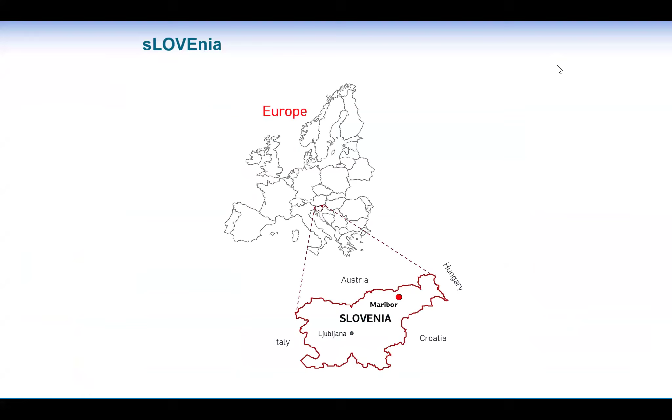So Slovenia is a very small country, as I told you. The nearby countries are Italy, Austria, Hungary, and Croatia. In between those, this small country exists.

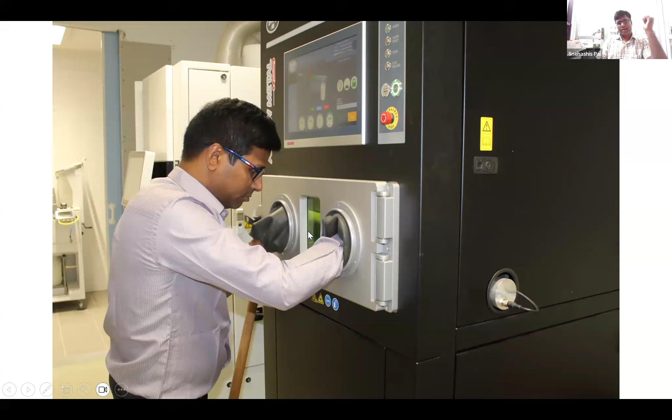This is electron beam melting. Before, it was selective laser sintering, which works using a laser, and this is electron beam melting, which works using electrons. And this is the machine for powder making, an atomizer, for the metal.

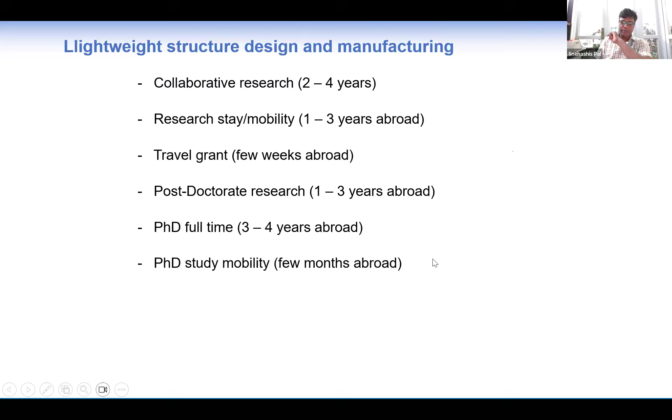There are a lot of funding opportunities. Research mobility is also possible, from a few months to a few years. For travel grants, maybe a few weeks. And postdoctorate is also an option, for 1 to 3 years, or sometimes a bit more. Also for PhD, either a full PhD or PhD mobility for a few months is possible.

Institutional funds are also possible, though sometimes quite limited. There's also DST, which sometimes gives opportunities for collaboration with Europe and other countries. So there are a lot of possibilities, and the funding may cover monthly salary, or per day for short visits, as well as travel expenses, accommodation, health insurance, visa costs, and other research costs if needed.

So it is possible. If somebody is interested, you can contact me later, or we can discuss it further.

Let's start about metal printing, how we can do the process, and what happens inside the material. So additive manufacturing, also known as 3D printing, is very well known. But technically, we can say additive manufacturing is a layer by layer process to build up a full product. Additive manufacturing is actually very good for reducing pollution.

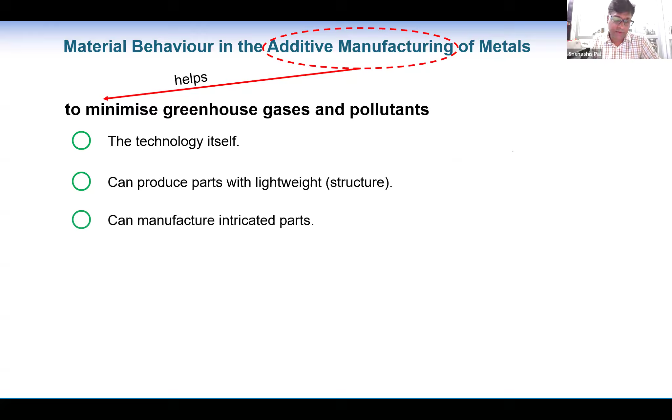It's a technology and process where less greenhouse gases or pollutants are released. It can also produce lightweight structures, structurally optimized, like topology optimized structures or cellular structures. We can design it in a CAD model and directly print it as is. In most materials, including metal, it's possible to fabricate those designs or parts.

And it can be manufactured as an intricate part, so we can use it for other purposes, like a micro reactor, for solar fuel generation, or a heat exchanger. It is possible to fabricate this easily.

Also, customized production is possible, even for bone implants, which is mostly why people use this, like skull implants, hip joints, knee joints, something like this.

On-site fabrication is also possible, as the machine is very small. We can just connect it with an inert gas and power system, then start fabrication wherever we want. So it's very easy to fabricate in most places.

And the charging capacity of batteries can be increased using some technologies, by controlling the metallurgical properties. This is possible by changing the metallurgical properties, or the porosity. We can generate, for example, a thermoelectric generator.

We can also prepare a hydrogen production system that can be increased, by breaking hydrogen and oxygen apart with the material process. As well, we can capture solar energy by using different types of control systems in the manufacturing process.

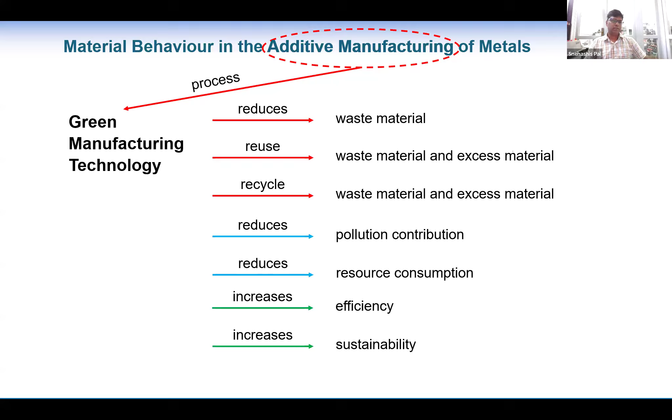And 98% of material can be reused as well, and recycling is also possible easily. So that's why it reduces pollution, reduces resource consumption, and increases efficiency and sustainability. That's why in the future it will be very much needed for manufacturing, especially for customized as well as mass production, because mass production is still costly. But if we can increase the possibilities and the technology, later on we can control the cost.

In additive manufacturing, the process is very simple compared to conventional manufacturing. In conventional manufacturing, we have to melt the material, make a casting, and then go for shaping or turning to get the product. For additive manufacturing, only one machine is enough to fabricate whatever part we need. From a CAD model, we can input it here and fabricate that part.

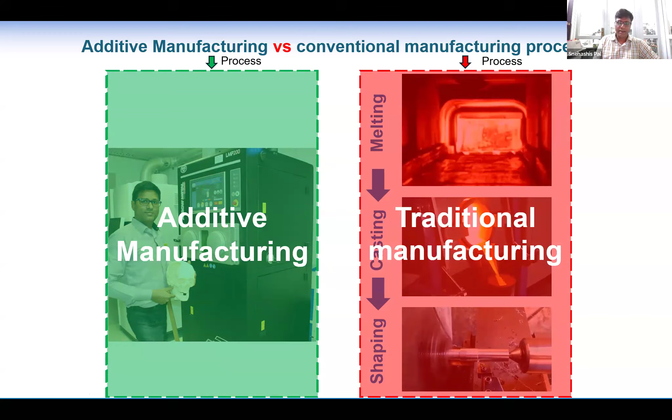So this is all the conventional manufacturing process we have to go through, while additive manufacturing is very simple. That's why it can be an easier manufacturing process, where machine learning is possible, and AI technology can easily be input there for fabrication. It's actually in the research process now.

In additive manufacturing, there are several types, depending on the technology and material used. There's selective laser melting, where laser power is used to melt the material, ranging from 10 watts to about 300 watts. It can be a little less or more, but 100 to 200 watts is usually enough for melting the material.

For electron beam melting, electrons are used to melt the powder, using a few kilowatts of power. For selective laser sintering, used for polymers, low laser power is required to melt or sinter the powder particles—it can be tens of watts, or sometimes just a few watts, though sometimes more is required.

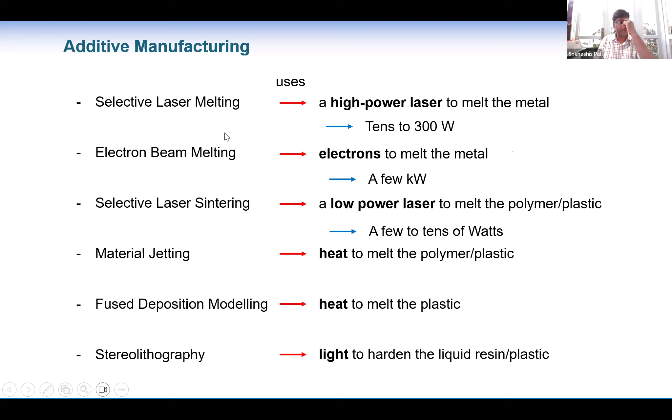There are other additive manufacturing methods too, such as material jetting, fused deposition modeling, and stereolithography, where light is used to harden resin or liquid plastic material. Today I'll mostly go through additive manufacturing for metal, since selective laser melting is the most popular among metal 3D printing processes. We'll go through it slowly.

In normal manufacturing, whatever knowledge we have can be applied directly in additive manufacturing, where chemical affinity can occur, along with thermal gradient, residual stress and shrinkage, crystallization with temperature, cooling rate, and everything else involved.

Micro cracks can occur, melt flow and Marangoni flow knowledge is required, along with pore formation—though pore formation is a bit different here. There's also high melting temperature for some metals, which can cause some problems, but it's possible in an easier way in additive manufacturing. So we have to know all this technology to control the metallurgical properties and fabricate to meet the desired properties.

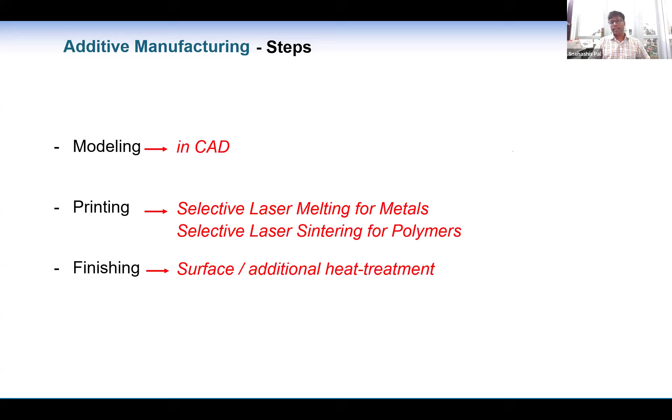In the additive manufacturing process, very simple steps are required: modeling by CAD and printing by 3D printing—that's enough, more or less, though finishing may be required. So modeling by CAD, printing—selective laser melting for metal, selective laser sintering for polymer, for example—and finishing may be required, like surface finishing or additional heat treatment.

Sometimes finishing may not be required, or it may be possible directly through the 3D printing process—there needs to be some research on that as well. It's also possible to make a 3D scan of a model, so we can replicate it in the original product system, allowing us to fabricate a similar shape accordingly.

So how do we do that? Whatever we need, we can fabricate this way: we can 3D scan a model, and by using a 3D scanning system, we can make a CAD model and then produce the part—it can be polymer or metal.

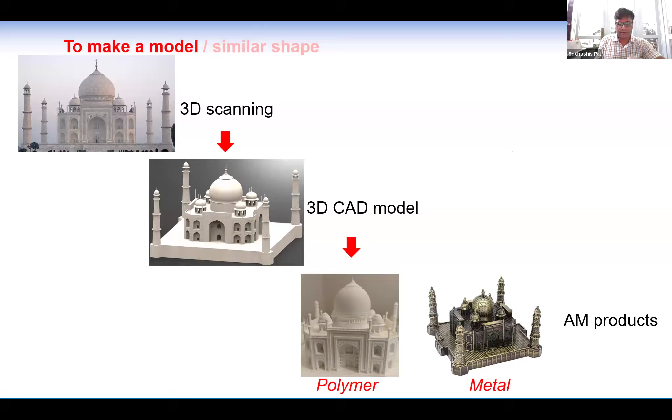A similar shape can be done whenever we need it for some specific purpose, like a bone implant or a skull—we scan it to get the accurate actual shape, and accordingly we can print it and get the part. It looks easy, but there's a lot of insight needed in the material process. Even so, we can get some intricate parts as needed.

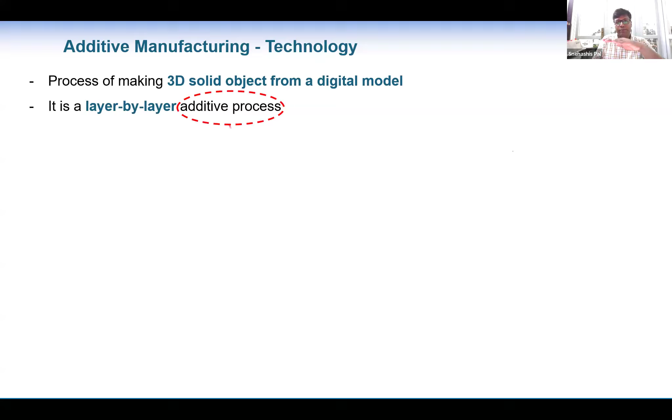Correct. So in additive manufacturing process, it's a process of 3D printing - I mean converting the digital model to the real one. So it's actually done layer by layer. It can be from micron size layers, tens of microns, to maybe sometimes more, depending upon the technology. For metal powder bed systems, we use more or less 20 micron to 100 micron layers. So that's why, as it is an additive process, it's called additive manufacturing.

And any complex shape or geometry can be fabricated this way. This type of complex shape we can fabricate. In the future, people are trying to fabricate even body parts and organs.

So even in low material loss, as I told you before, as we use powder material, whatever we need we just melt and fabricate that portion, and the other part of the powder remains as it is. So that's why it's quite easy - we can reuse the powder again. The powder particle size, as I told you, can be like 20 micron to 100 micron.

So for metals and for polymers, generally liquid or powder forms are okay, very good. And powder is also used for ceramic particles - we can use some binder and fabricate something, though it is quite challenging for ceramic particles in producing the part.

However, as I told you, it's a very small space - in the future it would be like a computerized box, maybe. And in general, the material properties we can control a lot, like density, porosity, microstructure. We can even tailor these too much here. And also in-situ alloying possibilities are there.

So in metal additive manufacturing processes, as I told you, selective laser melting is more famous, and metal powder is used to fabricate the part. Electron beam also uses powder, and there are other processes we can go through. It's possible somehow, and there are a lot of new technologies coming out where we can incorporate it in the future, and research is ongoing. But still, electron beam melting and selective laser melting are more popular. And comparing these two, selective laser melting is what people are mostly using, and there are a lot of applications for it.

There are also applications in Slovenia we had, for 3D printing, mostly implants and also denture, teeth and crown applications, and for hip replacement, also for the skull if broken, also the face or any bone can be replaced by the selective laser melting process.

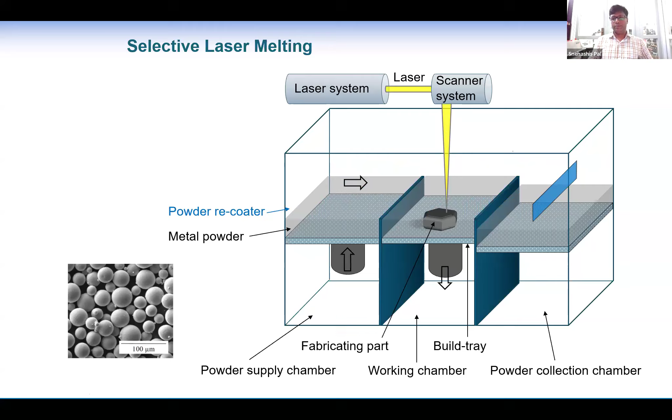It looks quite nice and easy to think about, but there are a lot of machine possibilities, and material characteristics occur, as melting happens in a tiny zone, since it is a powder bed system.

Like metal powder bed, that's why it's called powder bed fusion. If it is laser, then laser powder bed fusion. If it is by electron beam melting, it can be called electron beam melting powder bed fusion. But for laser, now this new name came, it should be called laser powder bed fusion, that's the ASTM standard.

In this place, a lot of phenomena occur in a tiny zone. Mostly, the melt pool occurs, and there is a heat affected zone. This is the powder, this is the laser ray. There will also be a mushy zone and some other effects. So there are a lot of other zones associated there.

We have to master that to control the metallurgical properties of the part. So I will go through a little bit on how we can control those things. We can control the melt pool characteristics, and accordingly we can get different results, like density, porosity, microstructure, hardness, tensile, and other properties.

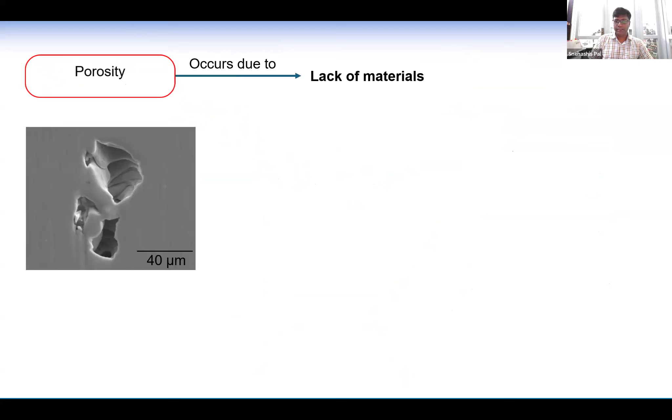Let's discuss density. Density mostly depends upon the porosity, so if we can control the porosity, if we can minimize the porosity, density will be enhanced. Why does porosity occur here? Because of lack of material, obviously, and it looks mostly like this - I will explain this in more detail later. The phenomena are mostly material spattering, where molten metal can sputter out from the action zone.

Wherever melting occurs, let's say here, this place is actually a tiny melt pool. It looks more or less like this, if the scanning direction is this side. So on that portion, there are a lot of things happening, which I would like to go through.

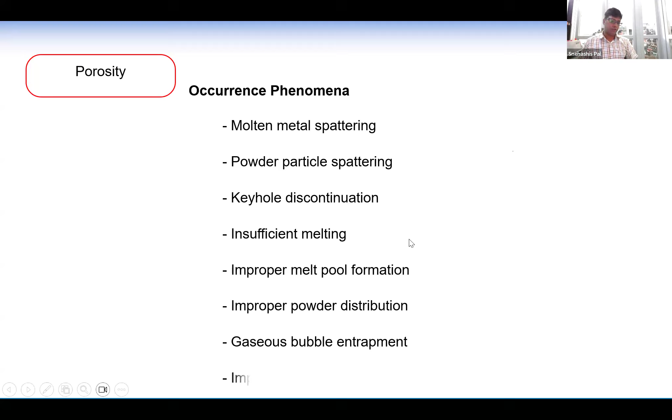Molten metal can sputter out from that place, and also powder particles can spatter out. Keyhole discontinuation can also occur, along with insufficient melting or improper melt pool formation. Powder particles may not be distributed well by the recoater system, gaseous bubbles can be trapped as is known in casting processes, and improper bonding between layers or tracks can also occur.

About molten metal spattering from the melt pool: when the laser falls down there, the metal powder melts and forms a melt pool. If the melt pool contains some gas bubbles, they can explode, and so the material can go out.

Also, if the viscosity differs, then from the corner side of the metal, material can go out from the action zone. A lot of material can sputter out and create a lack of material, making a porosity. Also, powder particles from the action zone can go out.

This happens due to heat shock, or due to the expansion of interparticular gas, which can expand suddenly at the scanning speed velocity, let's say 1000 millimeters per second. A lot of heat shocks occur there, which is why powder particles can move out.

Also, there will be a cyclone here, so cold gas will come from outside to inside, and powder particles can be moved out too. For heavy metal it's not much of a problem, but for lightweight metal, let's say magnesium, it's very difficult to control because a lot of powder will move out from the action zone and create a lot of pores there.

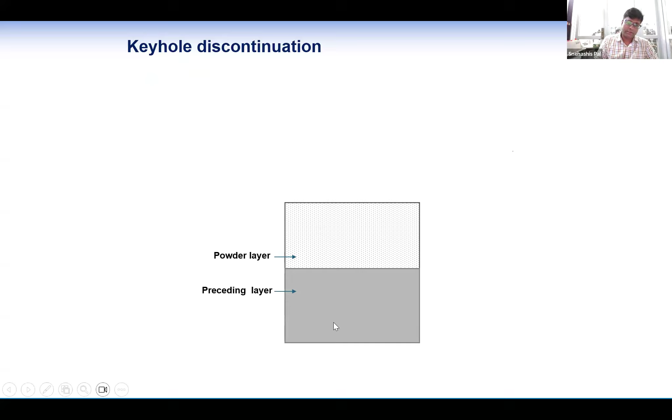Also, keyhole discontinuation can occur, as is well known in the welding process. Let's say this is the powder bed, and the lower preceding layer is already solidified. The next layer falls down here, and a small melt pool starts.

Due to evaporation, a small keyhole starts. This green area is the evaporating material, so a small keyhole occurs there, and it slowly enhances, going to a bigger one. When the laser falls down there, it gets deflected inside and creates gas pressure from the evaporated material.

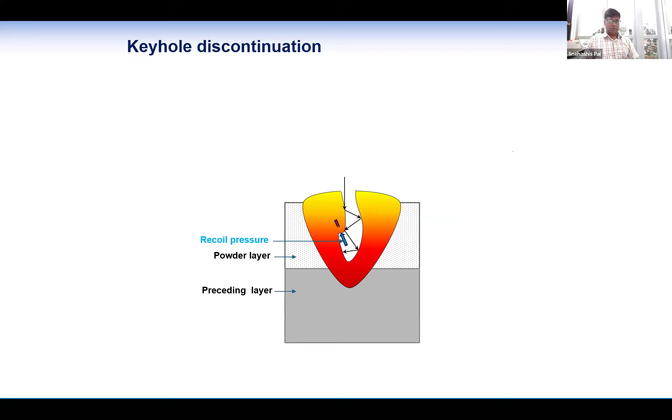There will be a recoil pressure from the material vapor, and also surface tension from the liquid metal. If those two are equal, continuation will occur. If not, if surface tension increases, it can collapse, interrupting the vapor, and after cooling there will be a pore.

The pore can look like this, where you can see a small corner point where stress can accumulate, and a micro crack can start from there. That is a problem in metal 3D printing. Also, insufficient melting can occur there.

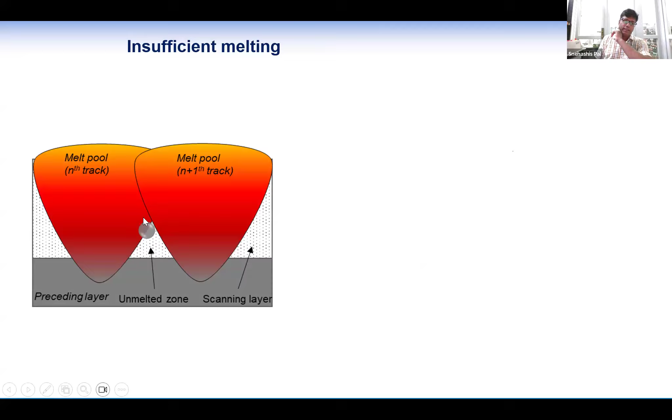Insufficient melting can occur when two melt pools meet and some powder particles get stuck there, not well melted. There will be some portions here, and a particle there, so the pores are really uneven, causing a lot of problems during mechanical loading. Let's say this is one powder particle, this is one melt pool, and this is another melt pool. If we look closely, a crack can initiate because during cooling, this melt pool will sink a little bit and become smaller. Then there will be a gap, and due to the gap, a crack can initiate during cooling or during mechanical loading. The crack can initiate from here.

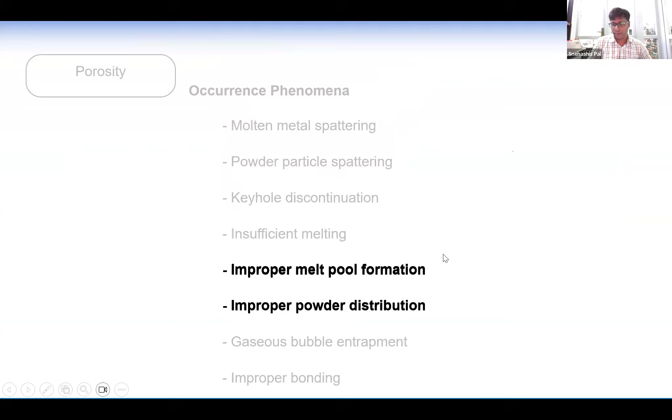That's the problem, and also improper melt pool. Improper melt pool mostly occurs due to improper powder distribution, where somewhere powder can be excess or somewhere powder can be less. If it is excess powder, the melt pool will be a little bit higher, so there is a higher chance to have more gap in the bottom, and maybe an unmelted zone. Or if it is lower, less powder, then the melt pool will be in the lower portion, or a lot of powder particles will be spattered out due to the high energy density occurring there, so there will be porosity again.

Also, gaseous bubbles can create some problems during the vortex. The gaseous bubble will also move with it, since it cools down from bottom to top. That's why the vortex will also go upwards along with the gaseous bubble. If it stays there, it will create a pore. But if it stays at the top, during the next layer melting it will be added to the next layer, so it won't be a problem. But if it stays in the bottom or middle place, it can remain and create a pore.

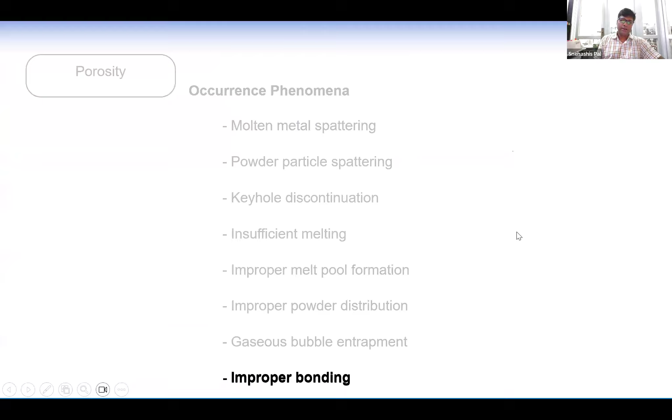Also, there can be improper bonding. Bonding issues can occur depending upon the layer thickness, as well as the quality or bonding characteristics between the materials. This problem can also occur, resulting in pores or micro cracks.

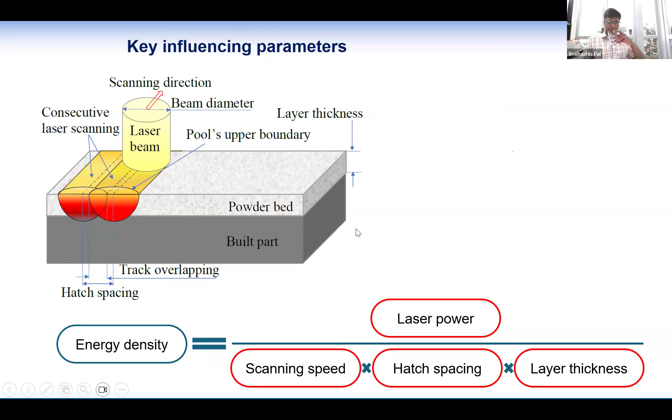So let's go through microstructure, how it can be controlled. For electron beam melting, there is actually elevated temperature of the processing chamber, about 700 degrees centigrade. So the cooling will be slower. So microstructure will be different there, rather than the cooling rate of the selective laser melting.

So in selective laser melting, the machine temperature is mostly like room temperature or maximum 100 degrees. It can increase slowly, but the cooling rate is very high, like a quenching. So the melt pool or whole part cools down very fast. That's why the microstructure differs from electron beam melting to selective laser melting.

So the critical cooling rate, let's say for titanium, is 410 degrees centigrade per second. If it is higher than that, a different microstructure will be created. Accordingly, the microstructure for electron beam melting is quite similar to the casting process.

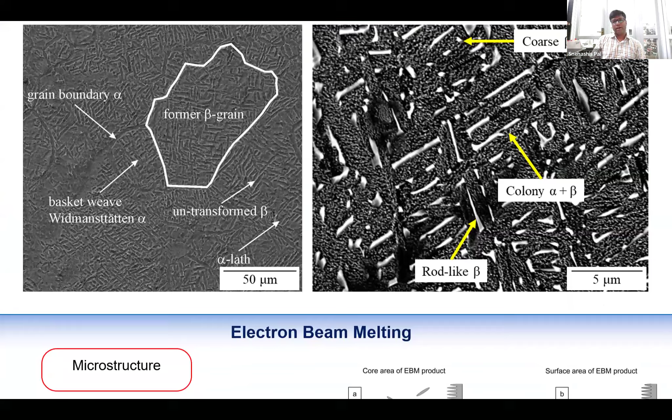This is an example for the titanium alloy, titanium 64. There will be a lot of other possibilities, but electron beam melting has less possibility to tailor the microstructure. If you are interested, I will go through later how it grows slowly, the alpha lath.

In selective laser melting, there is a very fast cooling rate, and also layer by layer heat cycle effects. That's why there forms a lot of hierarchy of the martensitic structure, like alpha prime martensitic needles.

It can be primary, the bigger one, secondary is quite smaller, and tertiary and quaternary much smaller, like a hierarchy is formed. So when a crack starts, it will give more strength and protect against crack growth.

That's why it gives high strength, but as there is too much martensitic formation, it's actually very hard material, therefore less ductility occurs. So sometimes it's good for strength, but from a ductility point of view, it's not good.

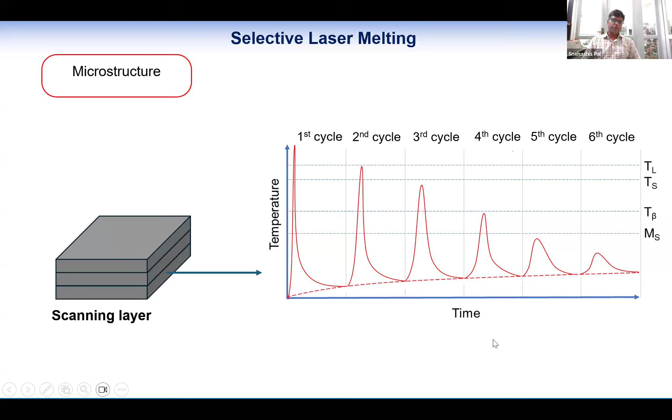The bigger one will be formed in the beginning, and the smaller one will be formed in the last cycles. That's why there are a lot of differences there, due to changes of scanning power, laser power, and scanning speed. So small grain to bigger grain, or irregular grain to classical hexagonal grain, we can get also.

Also the columnar grain can be regulated, like thicker to thinner we can get even. You can also control in between the microstructure by changing the parameters, mostly those 3 laser parameters: laser power, scanning speed, and hatch space.

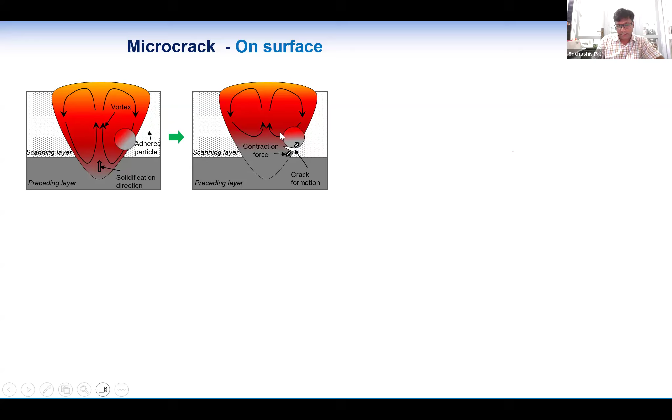There can be also some micro cracks. When a particle is on the melt pool, it can be partially melted, and it can also go inside during vortex, and during cooling, the cooling starts from bottom to upward. So this portion will cool faster, and the shrinkage occurs much faster than the particle, so a crack can initiate between them due to the thermal difference.

Another problem can also occur. Let's say the particle can go inside and stay, so then it will behave differently, as the microstructure will be different due to the different cooling system there.

On the surface, we can see planar or cellular, or columnar, alpha plus beta, even near the surface we mostly see martensitic structure for selective laser melting. So there are a lot of different possibilities in the microstructure, and we can control those to control the corrosion properties, as it mostly applies for bone implants, as I told you.

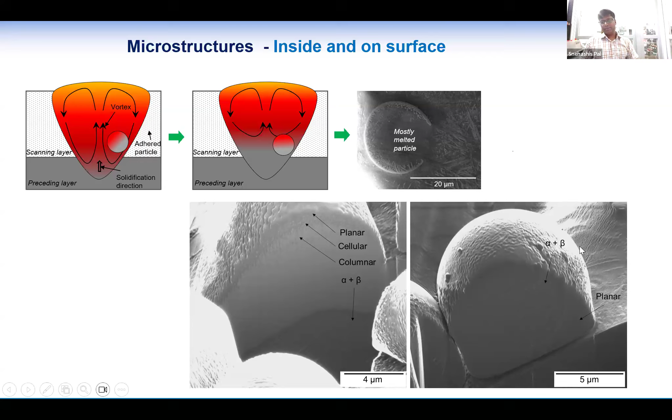So it is much more important to control the corrosion, and that corrosion rate we can control by changing the microstructure. However, there are a lot of other microstructure possibilities. If we change the temperature and such, we can change the microstructure, and we can see how it's actually formed.

So let's go through the hardness. As I told you, hardness can also be changed due to these three laser parameters - due to the scanning speed, higher scanning speed can give lower hardness, and also due to changing the power and hatch spacing, they can be changed.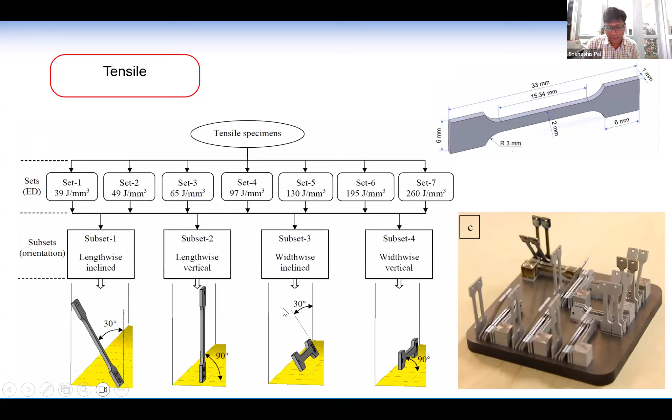And for tensile strength, depending upon the build orientation, we tried with four types of build orientation. Sample one is actually inclined 30 degrees, then also lay down, and then also inclined 30 degrees this way. As a result, they are actually okay.

We used several energy densities by changing the scanning speed. This gave more or less good results, and we can see this is the incline. Subset 2 is vertically built up, and this one is horizontally built up.

There are a lot of differences, even 200 megapascal difference between the strength, due to orientation - horizontal to vertical direction, also the ductility, like strain rate. So there are differences due to orientation, and also due to energy density or scanning speed, we get different strength.

So we have to find out the best density - best for corrosion resistance, best microstructure, or from a tensile point of view, best orientation to get the best tensile properties along the required direction, vertically or horizontally. We have to orient accordingly, and decide which power and speed we need to fabricate those parts to get good properties.

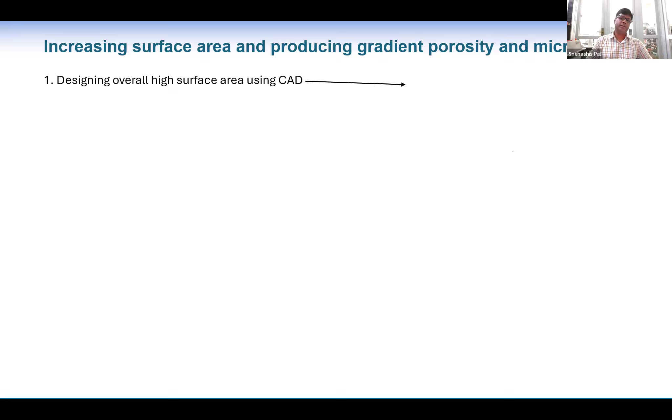For that case, we can increase the surface first of all by CAD model. Secondly, we can increase the pores so that we can increase the surface area, and then we can manipulate, by the manufacturing parameter, to make some pores on the surface, for another surface area increment. Also, we can increase the powder particle adhesion, so that even on the surface there will be increasing surface area.

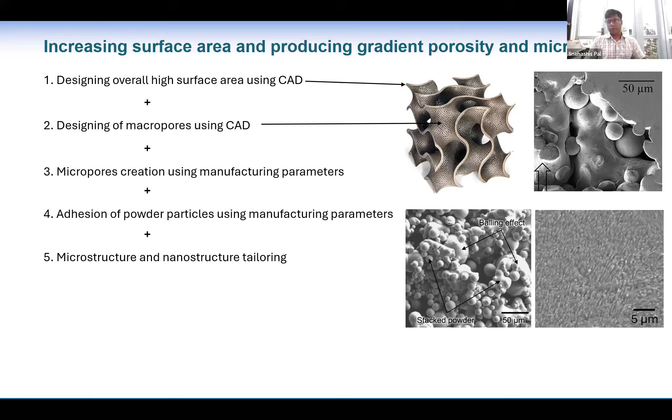Also, by microstructure, we can increase the surface area, or we can make some quantum dots on the material, and use it for capturing sunlight, or for hydrogen production from water. So that is also possible. This way, we can increase the charge capacity of the battery electrode for aluminum air or zinc air battery. This is very popular nowadays - a lot of research is going on.

So in aluminum air battery, whatever current available batteries are there, it can be 6 to 10 times more efficient. Cost will be reduced that much. So in the future people are trying to use these aluminum air batteries, though there are a lot of byproduct problems and how we reuse the product and control that. How we can change the battery instantly, let's say at a petrol pump, by some system. So many research are going on in that way, but still these possibilities are there.

This is new technology, and we can increase the surface area by 3D printing, and use it as an electrode in the battery system. So we can also apply this to micro reactors for solar to fuel conversion.

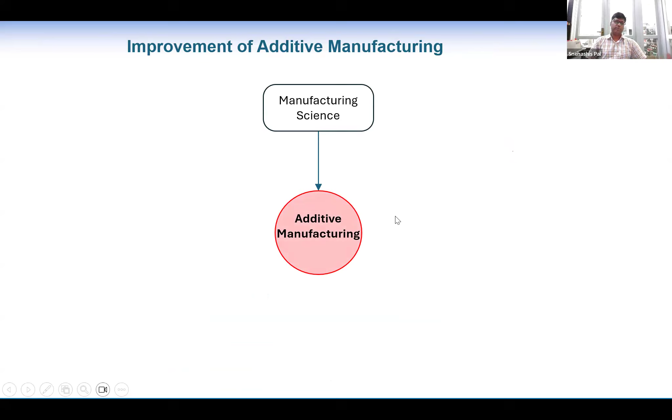However, the thing is that mainly additive manufacturing, whatever is there now, still needs more research and development. From a manufacturing science point of view, it is possible to enhance the process and properties by some knowledge of welding technology, powder metallurgy, or casting technology, and then we can enhance the properties there.

Also, from a material science point of view, there's also the possibility to strengthen the additive manufacturing process by knowing the phase transformation, molten pool behavior, alloying process, and thermal stress. Thermal stress is the main problem in additive manufacturing, as I told you - due to the high thermal gradient, the part can bend up or down, mostly up, and then the recoater which spreads the powder particles can get stuck, or the process will be stopped. Also, due to the bending, the part can crack and be destroyed.

So that's why this knowledge is required to improve the material and process of additive manufacturing, mostly for metal. And from a mechanical engineering point of view, heat transfer - nowadays people are trying to enhance how heat transfer knowledge can be simulated and applied. Also, machine system capability can be increased, and the powder flow process can be adjusted, or a suitable process can be applied so that we can get more control over the product properties.

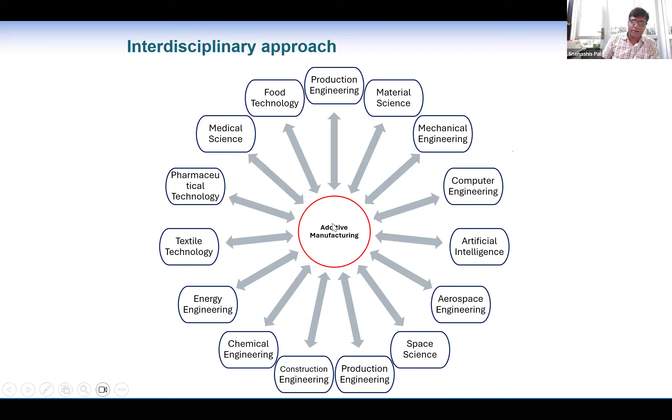Also in energy engineering there is obviously a lot of collaboration possibility, chemical engineering, construction, production - everything. So all these branches or fields are required to collaborate to enhance the properties of additive manufacturing, and we are very much open to that.

If anybody is interested from any field, with any idea, there are a lot of funding opportunities, especially in Europe, so that together we can apply, and if we get the fund, we can go through that way.

Though some funding may not be mentioned for India, maybe only for Europe, it is still possible to make somebody a researcher in that project, and then he can avail the project and continue it with the European researcher from India.

So in this way, I would like to discuss if you have any questions, regarding the manufacturing process as well as the funding opportunity. I'm open to discuss about that.

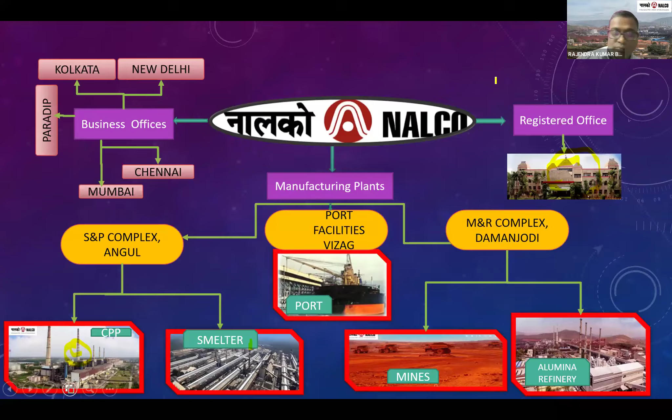Basically, we have taken the capacities of our plant. There's mines, refineries, smelters, CPP, and port facilities. In the mines, capacity is 6.825 million tons per annum. We are excavating bauxite at 6.824 million tons per annum, and it's producing alumina of 2.275 million tons per annum. And smelter capacity is 0.46 million ton per annum, that is 4.6 lakh ton per annum.

The power plant at Angul is producing 1200 megawatt power, which is transferred to the smelter for electrolysis process, about 810 megawatt, and the rest to the grid for the refinery processing. And alumina we are transporting through port facilities, and we also import soda lime through port facilities.

Alumina to aluminium, we are converting this through the Hall-Heroult process, which is done at Angul, and the Bayer process, which is conducted at Damanjodi. This is our aluminum ingots, our final product.

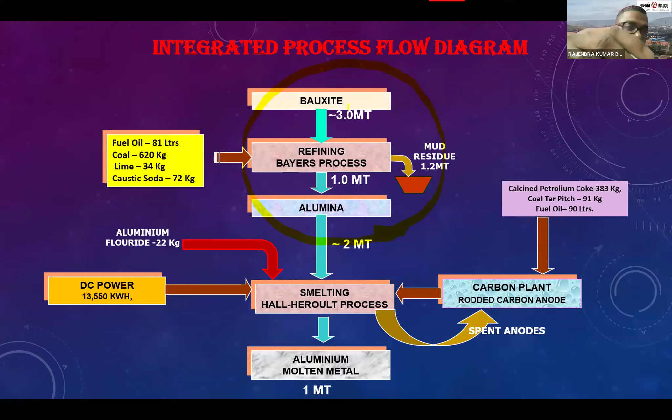If we are processing 3 million ton of bauxite and adding fuel oil/coal of 620 kg, lime 34 kg, and caustic soda 72 kg, then we are producing only 1 million ton of alumina. And from that alumina, if you take 2 million ton of alumina, we can get only 1 million ton of aluminium metal, through the Hall-Heroult process.

This is the Hall-Heroult process. This top one is the Bayer process, and this is the Hall-Heroult process.

In this process, we need DC power of 13,550 kilowatt hour, and by smelting we are getting aluminium. And for this we need cathode and anode rods/tubes from the rodding plant, which is also at Angul.

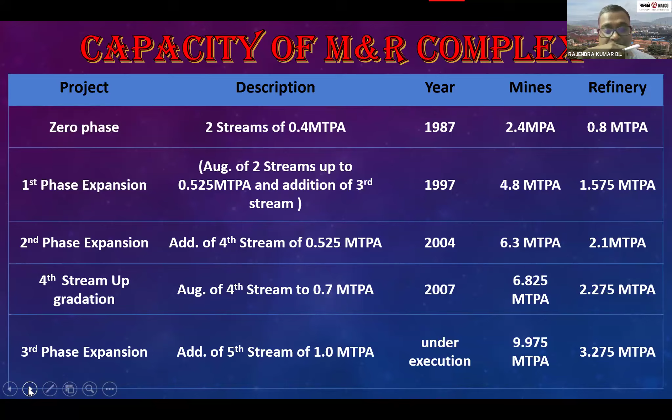Now we are in the process of expanding our plant by 1 million tons per annum, which is just half of the total capacity of the 4 streams. This is under execution. After this commissioning, we will enhance our production of bauxite up to 9.975 million tons per annum and refinery up to 3.275 million tons per annum.

This is bauxite mining, the lowest cost producer in Asia. We have 2 bauxite mines: one is Panchpatmali mines, and one is Pottangi mines. Panchpatmali mines is under operation, and Pottangi mines is under the 5th stream expansion project, which is under execution.

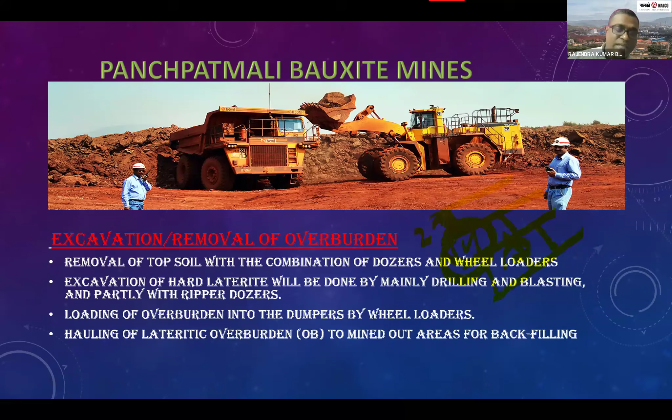Then we put a pilot hole, put explosives, and blast it. Then we load the overburden into dumpers using wheel loaders. I will show you those wheel loaders and dumpers. We haul the laterite overburden, up to 2 to 3 meters, out of the area for backfilling. After excavation, we also backfill that area and do plantation there. So this covers excavation or removal of overburden.

Next is mining of bauxite. After removing the overburden, we make pilot holes and blast holes, put in explosives, and blast it over. Then it is loaded into dumpers by wheel loaders and hauled to the primary crushers. The loaders load onto the dumpers, and then we shift it to the primary crusher house, which is at the mines.

The mining of bauxite: after excavating, we cut it in a slice manner. Bottom bauxite drilling of 150 mm diameter blast holes, selective mining with hydraulic backhoes, and hauling the ore to the primary crusher using dumpers.

These are the mining equipments: loader, dumper, and shovel, which are used for excavation. This is a dozer, which prepares the area for excavation. This is a crane and a ripper.

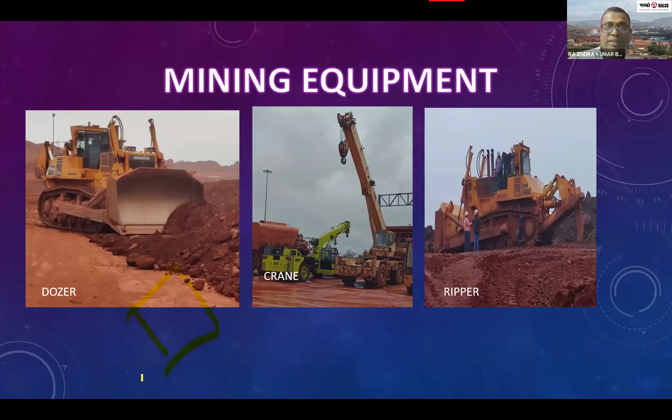After blasting, we get bauxite of size up to 800 mm, but we cannot transport 800 mm size bauxite lumps to the refinery. So we put it through a primary crusher, a double roll type crusher, with capacity of 900 to 1,200 TPH per stream, with 2 streams used in the bauxite mining case. Input size is 800 mm bauxite, which is shifted from the haulers to the crusher house, where it is crushed down to minus 150 mm size, and then transported through our cable belt.

This is the only belt in the world which has a cable belt at Nalco. This is our cable belt. This is the drive, and this is the cable you can see.

The belt is only resting over the cables. We have two cables over there. These are pulleys, they are the driving medium. This is the only type of cable belt here. This is a single flight cable belt.

This is a 14.66 kilometer belt with a capacity of 800 TPH, and lump size is minus 150 mm, which is crushed in the primary crusher house. We get the product at minus 150 mm, then we transport it to the refinery through this cable belt. The rated speed is 4.69 meters per second, and the rated conveying capacity is 7.125 million tons per annum.

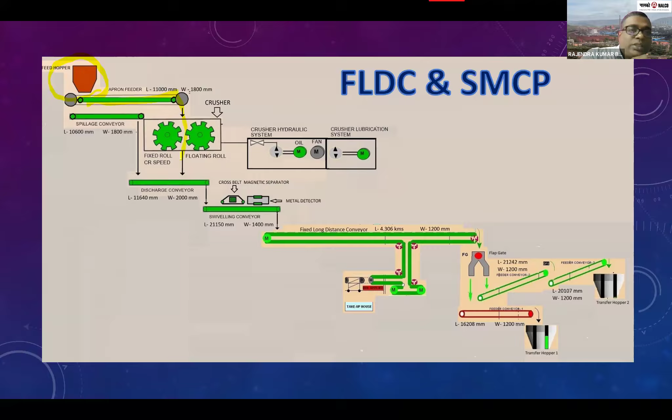This is the hopper, which takes in our bauxite of up to 800 mm size. Then it goes through the apron feeder to the crusher house. This is a tooth double roll crusher, same as the primary crusher house. And this is the spillage conveyor - whatever crusher spillage there is, that is also shifted to the crusher.

Here we have a cross belt magnetic separator, called CBMS, which separates the magnetic materials, rotating continuously. This is the magnetic metal detector which detects metals. If metals get through, it will damage our long distance conveyor, so we check all these things here.

Then it is a fixed long distance conveyor of 4.306 kilometers, which feeds to the main feeder conveyor here. This is the total conveying system of the bauxite mines.

This is stream 1, stream 2. I have told you there are 2 streams at the bauxite mines. This is the ROM hopper where we put lumps of 800 mm size, then it goes to the double roll crusher where we get minus 150 mm lump size, then through the transfer hopper.

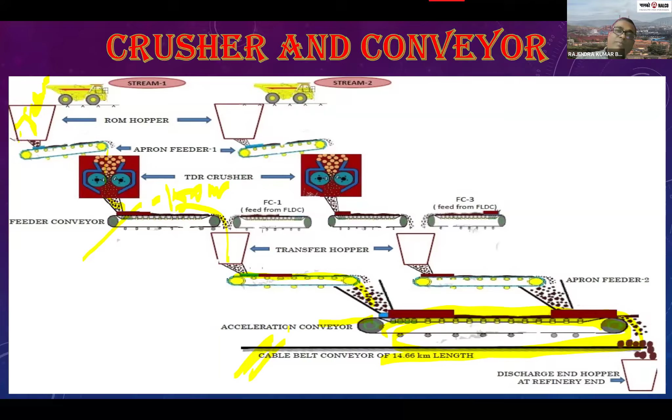And this cable conveyor transports bauxite from mines to refinery.

Now we are going to purification of alumina and transportation of alumina to port - that is Vizag - and to the smelter for further processing.

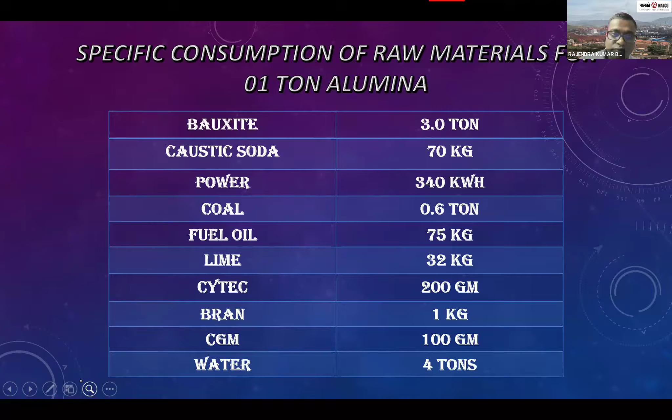So after transporting on the belt, there is a stacker over there. This is stacking at our refinery head. We have reached the refinery head. This capacity is 1800 TPH. Slewing angle is 180 degrees, and travel length is 690 meters. Travel speed is 7.5 meters per minute.

Just as we are seeing, if you see the sandwich, in this manner we are putting it. Okay, this is a stacker. We are stacking layer by layer, horizontally. But next slide is the reclaimer. When we are reclaiming, it's in this manner.

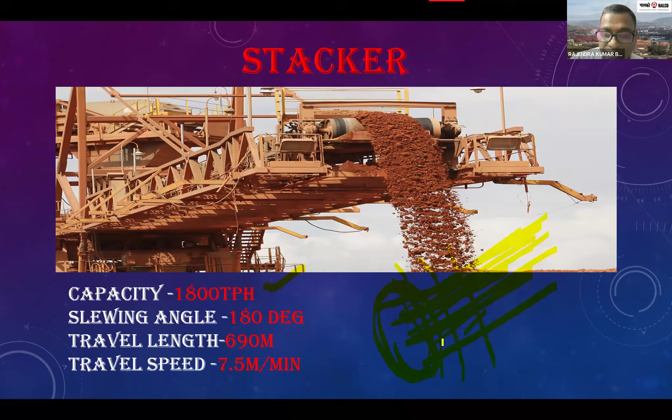If we are reclaiming this one, then it will be properly mixed with the proportion. Because we are excavating from different places, we are putting it layer by layer. Then we are excavating in this manner, reclaiming this manner. This is a stockpile over there where we have 4 stockpiles. Each pile capacity is 1.65 million tons.

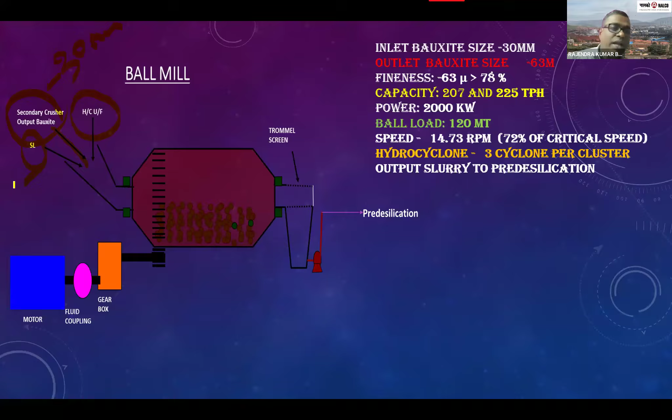Over here, we are putting the bauxites and we are getting 63 micron in this area. The liquid is flowing there. This is a trommel screen cover there, called trommel screen. Through the trommel screen, below 63 micron will be dropped over here, and through pump we are entering to the pre-desilication area.

Pre-desilication area means where we are only desilicating the bauxite, because we are transporting the material with silicon. So this is your process where we have motors. This is a fluid coupling gearbox.

This is your girth gear. This is a girth, which is a driving medium. This is a girth gear. These lines are girth gear threads. You can see this one is a girth gear.

This side is a trommel screen, which is the output from this one. This is your input, this is your output. This is in the original picture, it's a reverse side. This is your girth gear. This is your trommel screen. We're getting the output that is minus 63 micron.

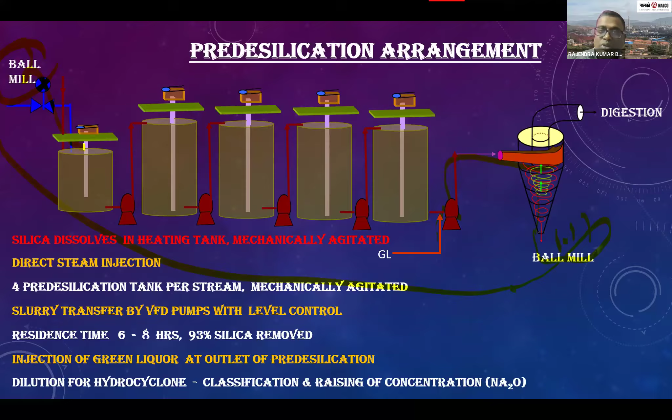Injection of green liquor at the outlet of pre-desilication area. Again we are injecting, this is spent liquor injecting here, and this green liquor we are injecting here. At this stage, mixing the green liquor, we are transporting to the hydrocyclone. Hydrocyclone underflow, which is heavier materials, again going to the ball mill, again going to the process, ball mill to this one. But the output of this one through overflow is going to the digestion area.

The proper mixing of the alumina. Injection of green liquor at the outlet. Dilution for hydrocyclone and raising for concentration of Na2O. This is a pre-desilication unit.

Residence time is approximately 2 to 3 hours. Temperature is we are heating the steam, that is 105 degrees centigrade. Digestion efficiency 90%. Soda concentration is 185 GPL. The agitator is purely mechanical one.

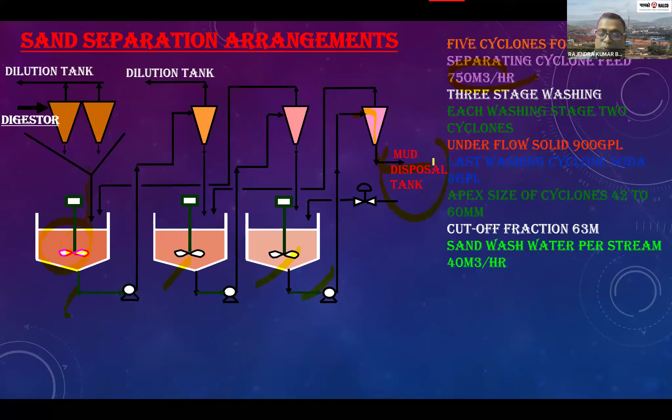Then we are putting the last underflow into the red mud disposal tank. Again, this is a sand separation area. Sand is coarse, undigested, mainly due to the presence of iron oxide over the bauxite.

Sand washing in 3 stages with cyclone system and counter current flow system. Counter current flow. Sand wash water is from RMP water or sodium condensate. Final wash sand, third stage. Underflow to mud wash tank, disposal tank, and first and second overflow to the dilution tank.

Again, it will be reprocessed in the dilution tank. Overflow goes for the process to the dilution tank. The first washing cyclone overflow, sand cyclone overflow, and the first washer overflow, it's all coming to the dilution tank.

Dilution reduces the soda concentration from 183 GPL to 167 GPL, a reduction in concentration to facilitate balance desilication in the post desilication solution, dilution by a part of washer 1 overflow, first washer overflow. So for proper dilution, we are taking it in the dilution tank. The rest, which is balanced silica, will desilicate in the post desilication process.

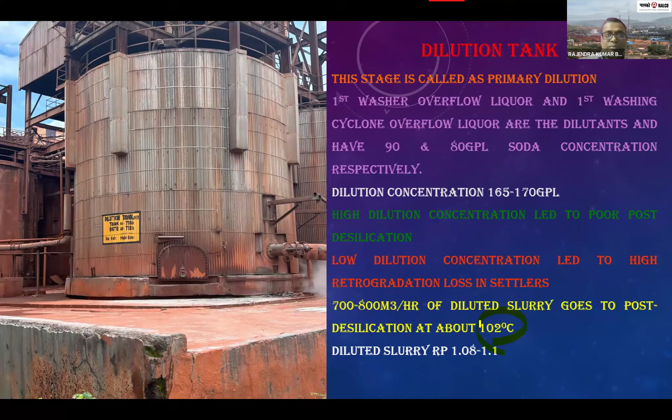Then the output of post desilication, we are going to the settler. One line going to the settler. This is desilicated Cytec solution, and we are settling. The underflow going to the washer, then this is your waste, part waste. This is your product, again going to the security filtration.

For Kelly filter to security filter, this is we are feeding to Kelly filter, where we have got first our product in the liquid form.

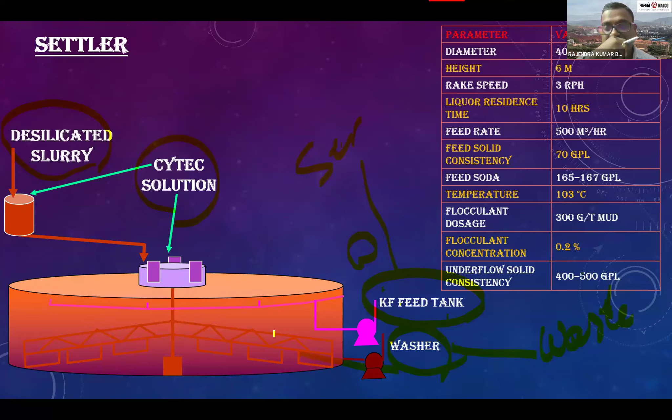We are adding flocculant over here to settle the red mud. Flocculant concentration 0.2%. Underflow solid 400 to 500 GPL.

Second, then the product with the washer going out to the washer part. This is your settler. In the settler, we have 7 number bottom settlers, two numbers working per stream, one for standby for all 3 streams. But we are not considering the fourth stream. Fourth stream has the HRD DCW, high rate decanter and deep cone washer. But in the old streams, first, second, and third stream, we have only the settlers and washers, fitted with a rake mechanism for outward pushing of the mud.

Single point mud evacuation process, fitted with a rake drive system, 3 drives. Torque rating to the 2,25,500 kg per meter. Collection of solid in the SOP tank, solid GPL in overflow, maximum 1 GPL.

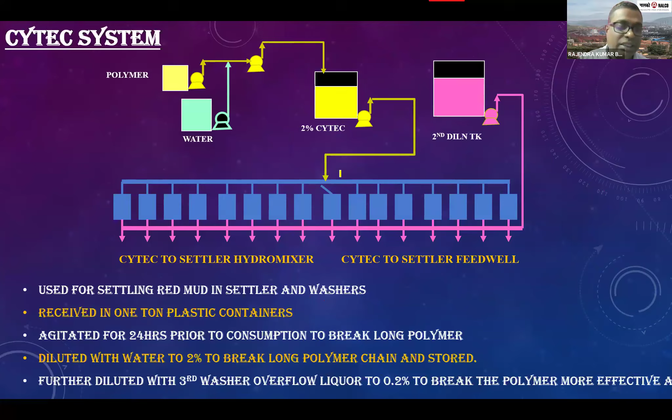Flocculant concentration is 0.2 solution. I will show you the flocculant concentration process. This is Cytec system, this is a polymer. We are adding water and 2% Cytec, and there is a dilution over here. This is Cytec to settler hydromixer, this one is hydromixer.

Used for settling red mud in the settler and washers. Received 1 ton of plastic containers, agitated for 24 hours, this is preparation of Cytec, which is added to the settlers. Received 1 ton plastic containers, agitated for 24 hours prior to consumption to break long polymer. Diluted with water to 2% to break long polymer chain and stored.

Further diluted with third washer overflow liquor to 0.2% to break the polymer more effectively.

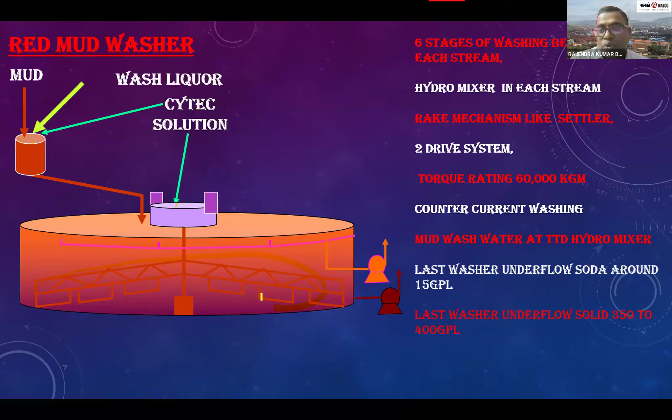The two drive system, torque rating 60,000 kg meter, counter current washing, mud wash water at TTD hydromixer, last washer underflow soda around 15 GPL, last washer underflow, which is transported to the red mud pond. Last washer underflow solid is 350 to 400 GPL.

This is the red mud washer circuit. You see, this is the counter current flow. Settler mud coming here, putting here in this, and it is going out. This is the out one. Mud from one washer pump to the next washer for further soda recovery. We are recovering the caustic soda, because this is a raw material we are recovering from the process.

Look here, from the sixth, this is TTD overflow. That TTD underflow is going to red mud. TTD overflow coming here and coming here, then this is reverse direction. This one is giving 6 to 5, 5 to 4, 4 to 3, 3 to again go to this one, and this one go to 1, 2. This is the counter flow. We are putting the mud from this side, and from the same washer we are getting the caustic soda. Mod from one washer pump to the next washer for further soda.

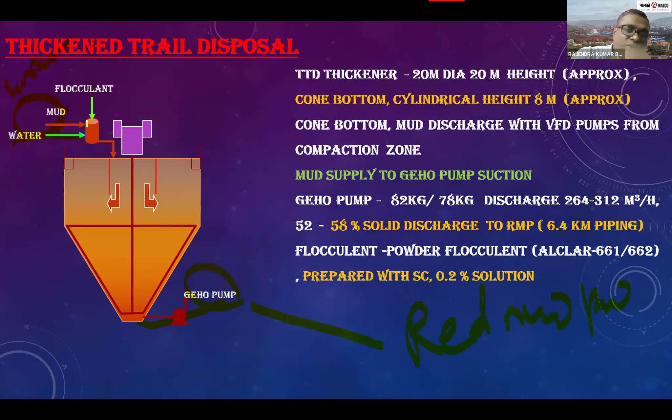Then this is TTD. The underflow, which is going to the GEHO pump to red mud pond. You have heard this name, red mud pond also. This is where we are adding flocculant, mud and water. The mud is coming from the washer. Then we are adding water and flocculant to settle it over here. And this is your TTD, thickened trail disposal method.

TTD is 20 meter dia and 20 meter height. Bottom cylindrical height is 8 meter approximately. Cone bottom mud discharge with VFD pumps from compaction zone. Mud supply to GEHO pump. GEHO pump is 82 kg, 78 kg discharge, 264 to 312 meter cube per hour, 52 to 58% solid discharge, 200 ppm, 6.4 kilometer piping, powder flocculant.

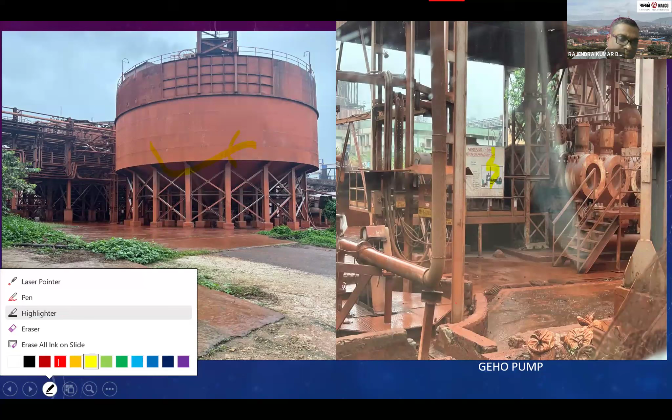Next is your Kelly filter. The first is the filtration. We are going to the filtration part. This is the waste part we have covered, that is the red mud disposal in the previous slide. In the previous slide, this part goes to the red mud pond. This is the waste part, where we are going to the other product part, the aluminate liquor.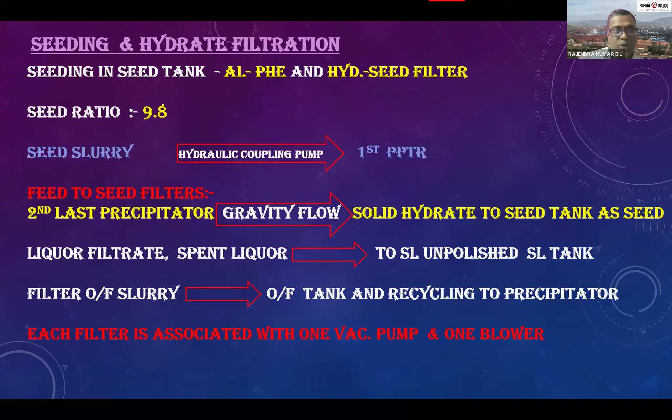This is the seed filter. Surface area is 140. Aluminate liquor again goes to the seed filter, then we do seeding and get the first stage filtration.

This is the fastest hydrate filtration going on. Surface area is 114 square meters for the old one, 120 square meters for the new one.

Cloth is non-woven polypropylene. Vacuum is 1.3 bar, blowing pressure is 0.5 bar. The cloth sucks when under vacuum, attracting the solids, and when blown, it expands and drops the material.

Feed solid consistency 600 GPL, slurry temperature 50 to 53. Seed filter type is vacuum disc filters. Number of filters per stream is 4, and we have 16 filters in total.

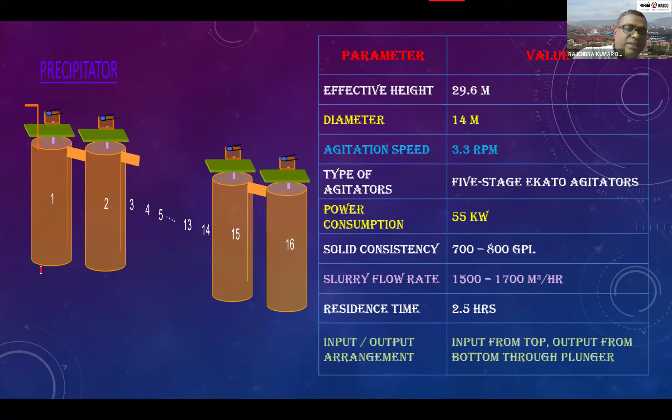Effective height of each tank is 29 meters and diameter is 14 meters. Agitation speed is 3.3. We have agitators in between for agitation purposes, this is a major task over here.

We have Milton Roy mixing agitators over there, five-stage Ekato agitators and balancer Milton Roy MRM agitators. Power consumption is 55 kilowatt, solid consistency 700 to 800 GPL, slurry flow rate is 1500 to 1700 cubic meters per hour.

Residence time is 2.5 hours. Input from top and output from the bottom through plungers. We have the plungers over there for the bottoms. These are your precipitation tanks.

Spent liquor concentration is 150 to 155. RP is 0.52 to 0.56. Flow rate per stream is 900 cubic meters per hour.

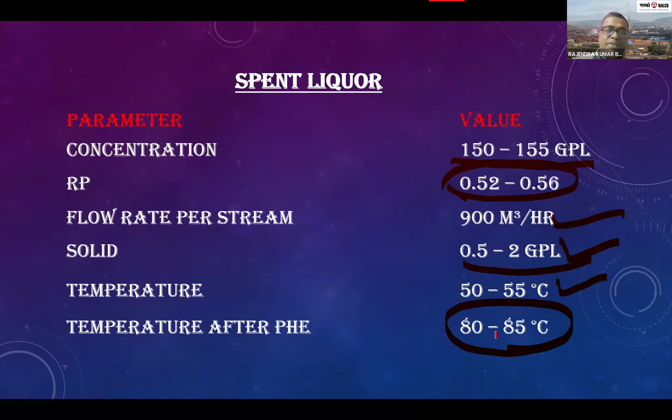Plate spacing is 8, 11. Number of passes is 4, and number of channels per pass is 13 and 13. Now we are going to the evaporation part where we are recovering our soda.

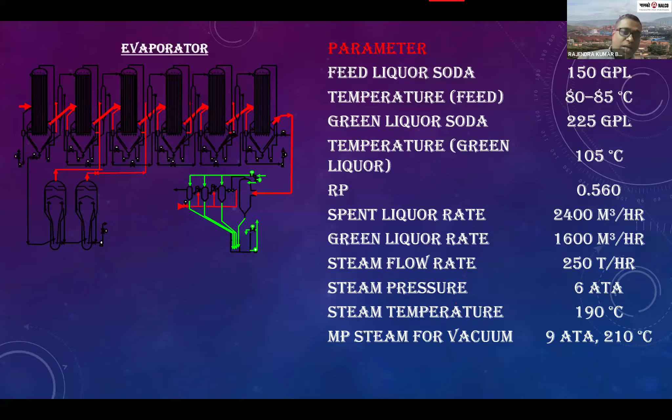Here in the evaporation process, we are recovering the caustic soda and sending it to the ball mill and the other area to the other spent liquor. This is our evaporation, evaporation I. We have A, B, C, D, E, F, G, H, I, and J, K. We have numbers of evaporators here.

This is our second stage filtration, drum filter area.

This is the first stage product slurry washing hydrate to get hydrate for storing or calcination. This is a rotary vacuum drum filters. Number of drum filters is 4. Major equipment in this drum filter area are drum filter, vacuum pump, blower, feed pump, conveying system.

Hydrate washing by hot sodic condensate. Main filtrate is known as second stage filtrate. Filtrate generated during washing and drying is known as wash filtrate. Wash filtrate is used for repulping first stage product. The first stage product is our seed filter. We got the products, and the wash filtrate is used for repulping first stage product.

Hydrate produced will have moisture less than 8% and Na2O less than 0.03%. This is the product we are getting, Al2O3.3H2O. We are also selling this product in the market, but we're not sending it to the smelter division, we are sending it to the market if required by the party.

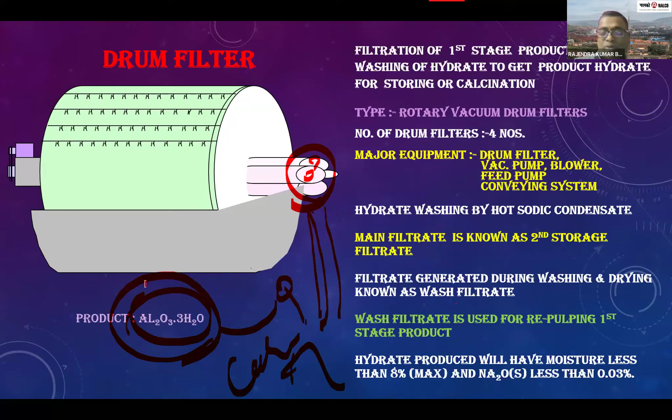We have entered Al2O3, 3H2O, SiO2, and so on for the bauxite, and at this stage we are getting Al2O3 trihydrate, alumina trihydrate. Then from the alumina trihydrate, we get alumina, that is Al2O3. In this operation we are getting Al2O3. This is our final product at the refinery end.

The physical property parameter value is minus 40 micron, and less than 45 micron is 12% maximum in availability, and plus 125 is 15%, balance in between. Alpha content is 10% maximum. Chemical component Al2O3 98%, this is the final product. Na2O is 0.5% maximum, calcium oxide 0.05% maximum, SiO2 0.02 maximum, Fe2O3 0.15. 98.5% minimum we are getting it, sometimes more, 99% or higher in our alumina.

This is our calciner D, sorry, this is calciner A. We have 4 calciners here, and we are further adding 2 calciners for the fifth stream.

After producing this alumina Al2O3, we are setting it into silos. We have 3 numbers of alumina silos, 1, 2, 3, each with capacity of 12,500 ton. We are sending it from the calcination through belt, conveying to this side and coming to this side. We have 3 silos right now, and again we are adding 2 silos for the fifth stream.

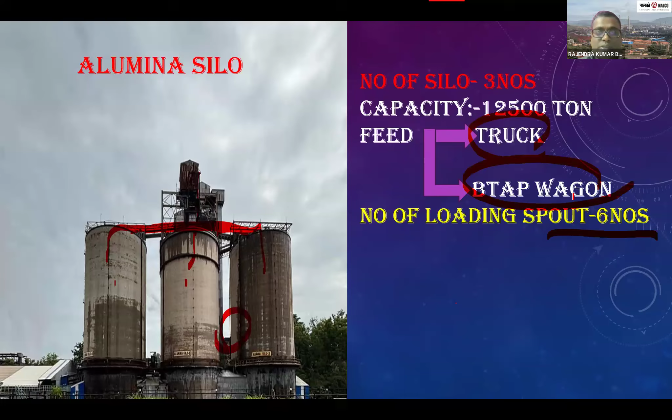Loading capacities, loading through spouts, there are 2 types of feeding. We are sending it through market to truck also, and through BTAP wagons. BTAP wagon is a bogie type alumina powder wagon. These are rakes, 48 wagons coming, making one rake. 48 wagons make one train and a half.

Again, we are going to the smelter and power plant, where we are processing the alumina to aluminum, that's the Al2O3, and we use electrolysis process for aluminium.

In the zero phase, since the inception in 1987, the capacity was 0.23 million ton per annum. In the first phase expansion in 1997, we added to 0.345 million ton per annum, with around captive power plant capacity of 960 megawatt. Second phase expansion in 2004 added 0.46 million ton per annum smelter capacity, and this has 1200 megawatt capacity in the second phase expansion project.

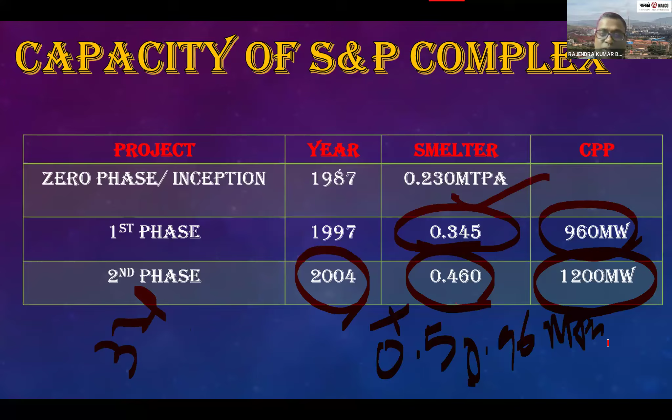And the third phase is coming up, and it will become 0.5 plus, meaning 0.96 million ton per annum production will be there.

The third phase is extraction of aluminium. Our technology partner is Rio Tinto Alcan. For the processing of bauxite to alumina is the Bayer process. From alumina to aluminum is the Hall-Héroult process.

The aluminum smelter capacity is 230,000 metric ton per year. Energy efficiency of our technology is 180 kiloampere cell technology from Aluminium Pechiney, which is now known as RTAIL, Rio Tinto Alcan International Limited.

Microprocessor based pot regulation system, fume treatment plant with dry scrubbing system, integrated facility for manufacturing anode carbon: 4 into 35 metric ton furnaces and 2 into 15 TPS ingot casting machines; 4 into 45 ton furnaces with 2 into 9.5 TPS wire rod mill; 2 numbers of 45 metric ton furnaces and 60/42 drop billet casting machine; two numbers 1.5 induction furnace with 4 TPS alloy ingot casting machine. All this is available in the smelter plant.

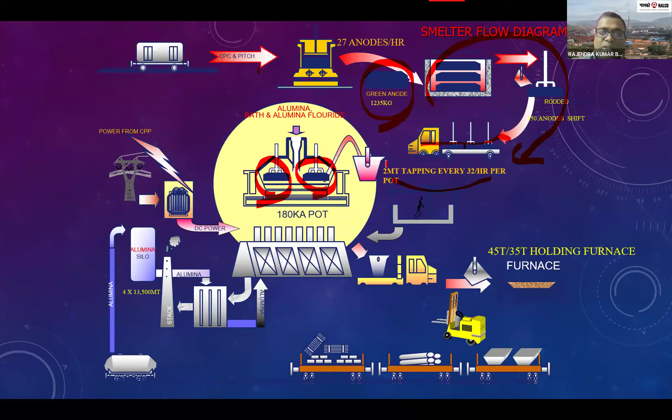This is where we are getting power from CPP. That's the alumina from Damanjodi, the alumina silo. We are transporting this alumina through the rake and storing it there. There are 4 numbers of alumina silos, each with capacity 13,500 metric ton. And from there, we are putting alumina into the pot.

We are adding DC power, and we are adding the anodes from the rodding shop, and we are getting the molten metal. Then the molten metal, which becomes slabs, goes to the furnace. In the furnace, we are getting different types of material: billets, slabs, and wire mills.

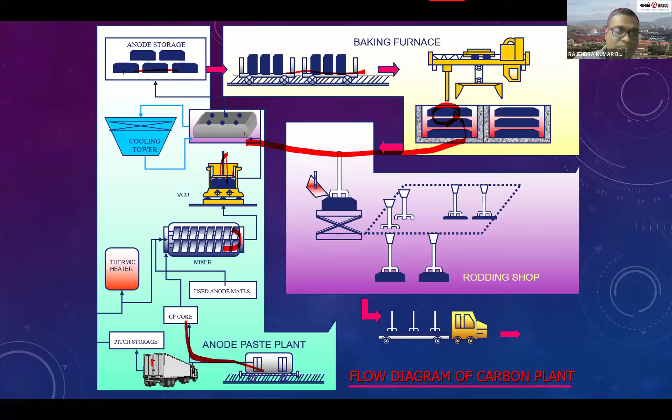Then it goes to anode paste, CP coke, pitch storage, and everything is put over here, mixed over here, and we are getting the rodding sub. The output is your rodding sub. We are putting the rod on the carbon plates, then shipping it to the pot.

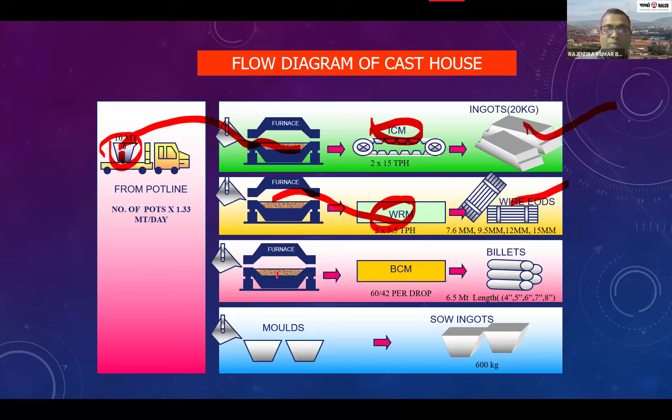This is a wire rod mill, where we are getting the wire rods. And the furnace is a billet casting machine. These are the billets; each billet casting length is 6.5 meter, and this is 7.6 mm. Each ingot weight is 20 kg. Molds to sow ingots: each ingot mold to sow ingot is 600 kg.

Number of pots times 1.33 metric ton per day. The standard ingots, sow ingots - this is a standard ingot, these are sow ingots. This is the wire rod mills, and this is your billet casting machines.

This is your cast strips and cold rolled coil strips. This is the electricity power - we are getting over 1200 megawatt power from CPP.

Now we go to the last part, the application of aluminium. We are seeing a surge in global demand of aluminium. You can see the aluminum demand in the global market.

In the global market, in 2020 it was around 86.2 million tons. Now it is 98.2. We expect it will be 119.5 by 2030, and similarly 147 in 2035, and 186.12 in 2040. By 2045 we expect it will be 234.8 million tons, growing at a rate of 5% per annum, with an additional 21.3 million tons required by 2030.

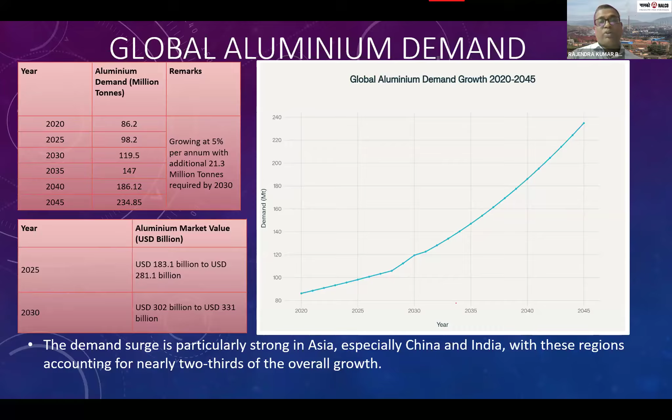The global demand is growing at 5% per annum. But if you see the market value in billion dollars, it has surged to 183 to 281 billion dollars in 2025, and we expect it will again increase in 2030 up to 331 billion dollars. The demand surge is particularly strong in Asia, especially China and India, with these regions accounting for nearly two-thirds of the overall growth. You can see this graph of the global demand up to 2045.

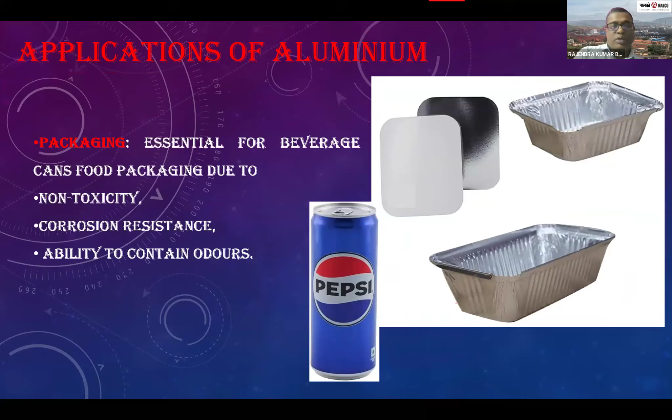Building construction: applied in building construction and structural components for corrosion resistance and lightweight design. This is also due to corrosion resistance and lightweight properties. We can also use it in window frames, doors, roofing, cladding, and curtain walls.

Also, consumer goods use aluminum for durability and aesthetics, such as electronics, kitchenware, and furniture. These are the uses.